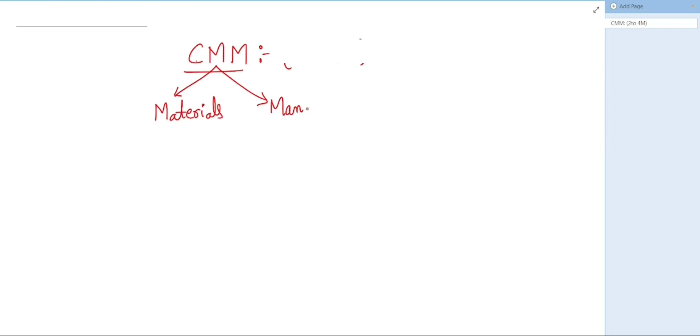In the materials category, we study about cement, then concrete, brick, and finally timber. So these are the materials we are going to study: cement, concrete, brick, and timber. Obviously these are the materials used in construction or for buildings.

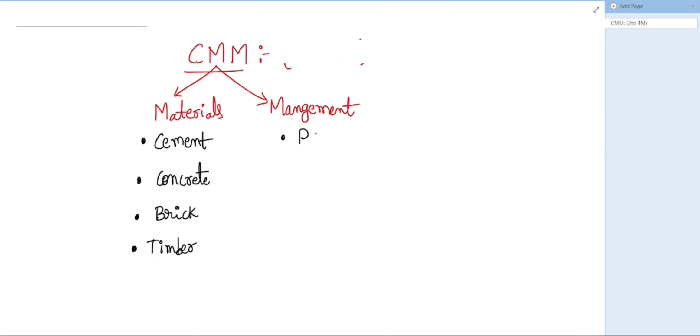And in management, we study about PERT and CPM. PERT is nothing but Program Evaluation Review Technique, whereas CPM is Critical Path Method.

So these are the contents of this subject. Now, the purpose of the subject - if you take total civil engineering, this is one of the easiest subjects. So try to concentrate on this subject.

I'll begin first with the materials. In that, I'll start discussing cement, then we'll go for concrete, then brick and timber. After this, we'll begin the second part of this subject, that is management, where we'll discuss PERT and CPM. Okay, all of you?

So here I'll begin with cement. Cement is called with one fancy name, Portland, ordinary Portland cement. In general or layman language, we call it cement, but it has this fancy name known as ordinary Portland cement. So cement means ordinary Portland cement.

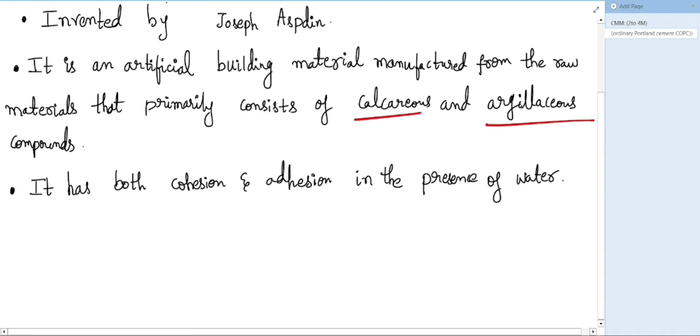So coming to the calcareous category, examples of calcareous compounds are limestone, chalk, etc. These are the major compounds that come under calcareous, used for the manufacturing of cement.

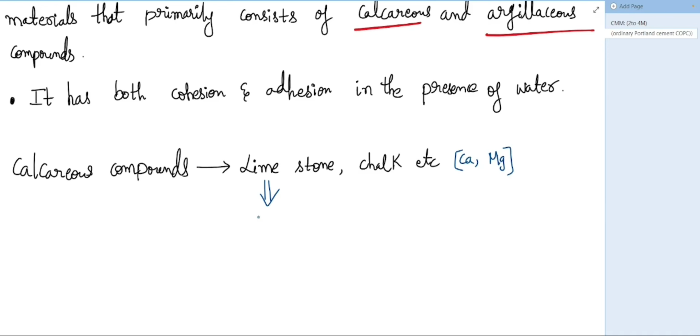Limestone and chalk contain mainly calcium and magnesium. Therefore, the ingredients that can be extracted from these calcareous compounds for manufacturing cement are lime, which is CaO, and magnesia, MgO.

So the next category is argillaceous. Common examples of argillaceous compounds are clay, shale, etc. These are the common examples by which we prepare or manufacture cement.

Now, the pure compounds are elements. The elements present in these argillaceous compounds are silicon (Si), aluminum (Al), and some impurities may also be present, like alkalis, sulfur, and iron. These elements are present in this argillaceous compound, but not in isolated form; instead, they are present in combined form.

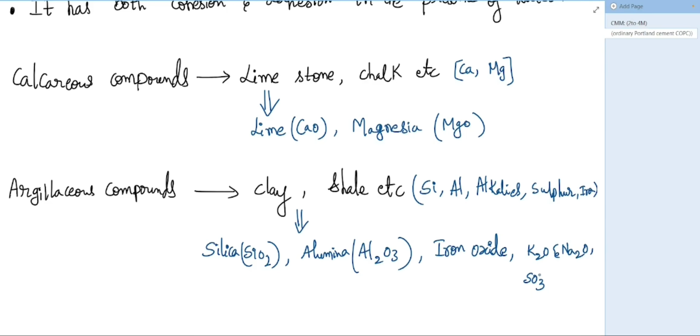For remembering these ingredients, I'll give you a code word. Please try to listen. This code word follows the percentage or proportion of the ingredients present in cement: L-S-A-I-M-A-S. Please remember this code word with respect to the descending order of percentage of ingredients present in the manufacturing of cement. Here, in L-S-A-I-M-A-S, L represents lime.

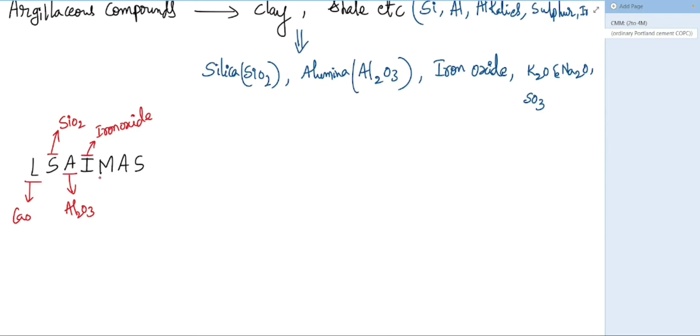Therefore, in cement, lime is present in the greatest amount. S represents silica. So the first major constituent in cement is lime, around 60 to 67%, and next is silica, around 17 to 25%. After that is alumina, which is further less, and then iron oxide, further less still. M is magnesia, and A is alkali, because alkalis are present in very little amount.

Alkalis are present only in traces. These alkalis are present in cement due to impurities resulting from the clay or argillaceous compounds. Those impurities we can't remove, no matter how precisely and sophisticatedly we carry out the manufacturing of cement. Still, some impurities in the form of alkalis are present in clay, so they remain in traces. Actually, they are unnecessary elements, but still they are present in cement.

So in the same way, this sulfur is also present. Now, are you clear about the ingredients present in cement in descending order, starting from lime to sulfur? L-S-A-I-M-A-S, right? L is lime, S is silica, A is alumina, I is iron oxide, M is magnesia (MgO), A is alkalis, and S is sulfur or sulfur trioxide.

Okay, so now let us try to understand the function of each ingredient in cement: the percentage amount present in the cement and its function. It means what exactly this ingredient contributes to the cement and what happens if it is present in excess. Now let us discuss about that.

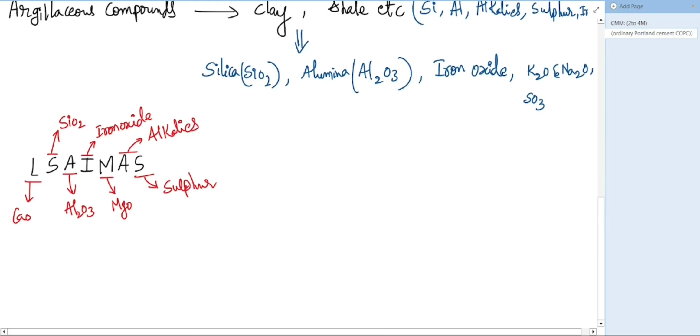So as I said, before going into the discussion of these ingredients, let me explain the reason for adhesion and cohesion. In cement, adhesion is due to calcareous compounds, and cohesion is due to argillaceous compounds, that is clay. Adhesion in cement is due to calcareous compounds such as limestone, chalk, etc. Because these calcareous compounds mainly consist of lime, which imparts adhesion or binding property. That is why adhesion is due to calcareous compounds such as limestone, chalk, etc.

Whereas cohesion is due to, as already discussed in our geotechnical engineering, the inherent property of fine grained soil such as clay. The same applies here also. Cohesion is due to argillaceous compounds or materials, argillaceous materials like clay.

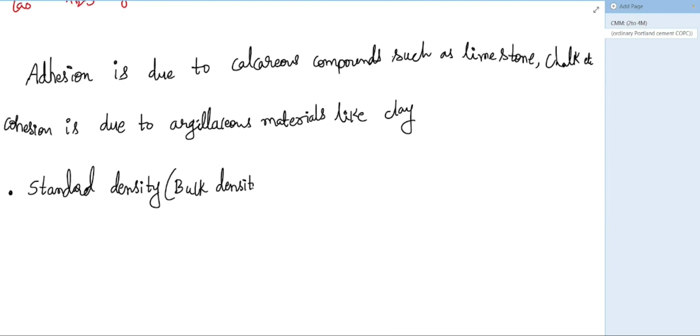So standard density of cement is 1440 kg per meter cube. So standard density of cement or bulk density of cement is how much? 1440 kg per meter cube.

So from this, can we calculate the volume of cement present in one bag? Generally one bag will have a weight of 50 kg, right? So one bag of cement is having how much weight? 50 kg. So density is known to us and obviously the weight is known to us. Therefore, the volume of cement present in one bag is how much? This is 50 divided by 1440, which comes out to be 0.035 meter cube, which is 35 liters. So one bag of cement has how much volume of cement? 35 liters, because one bag of cement weighs 50 kg and standard density is 1440 kg per meter cube.

Clear to all of you with this concept? So please try to respond. Clear to all of you?

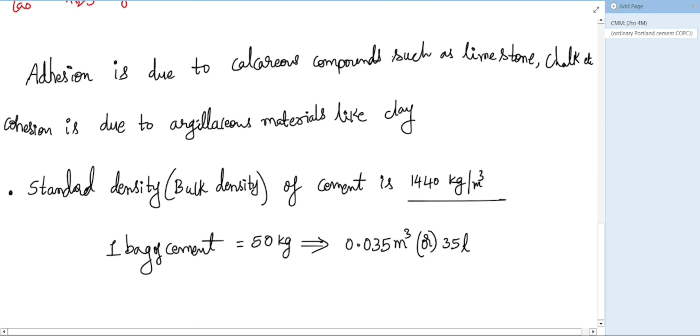Okay, now let us see the functions of the ingredients that are present in cement.

So chemical composition of raw materials. This chemical composition consists of various oxides. What are those oxides? LSAIMAS, right? Please remember this code word LSAIMAS.

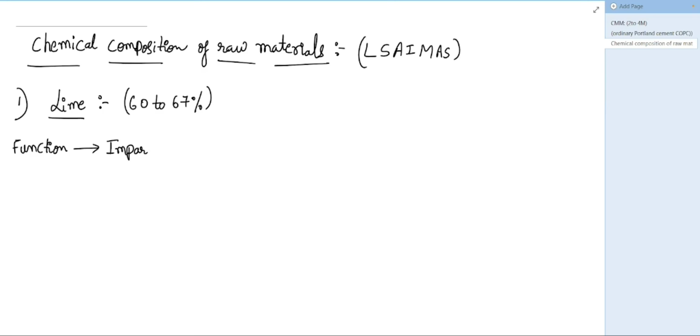And the purpose of this lime present in the cement - let me mention the function, or you can say purpose - is that it imparts binding and strength. So lime imparts binding and strength.

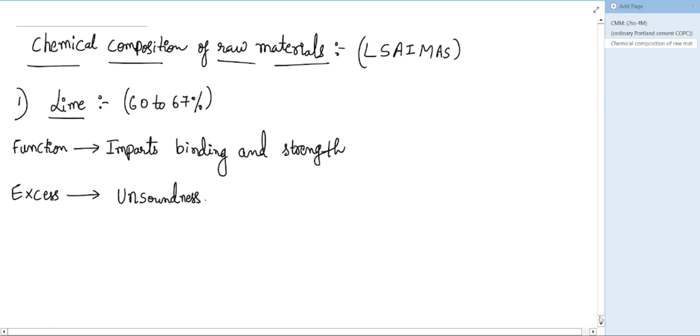But excess of lime causes unsoundness. What is meant by unsoundness and soundness? First you please try to understand, and later we'll discuss how the excess of lime will cause unsoundness.

Delayed increase in volume, or slow increase in volume, is known as unsoundness. Then what is meant by soundness? Soundness means no volume change or no volume increase. So unsoundness is nothing but delayed increase in volume, and soundness is nothing but no volume increase.

Now coming to the lime. As we know, lime's chemical formula is CaO, which is called quicklime. Why is it called quicklime? Because it is having higher affinity towards water.

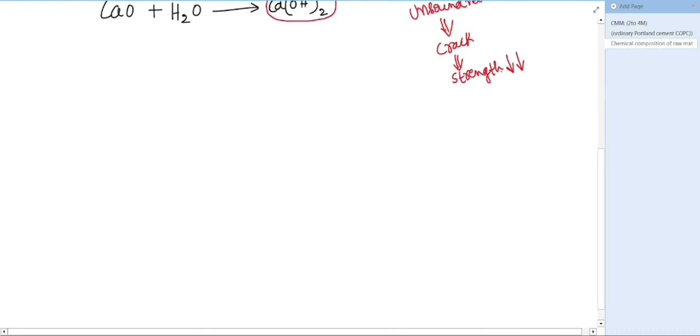So next important oxide is silica, SiO2. It is present in an amount of 17 to 25%. So in the cement, silica is present in 17 to 25%.

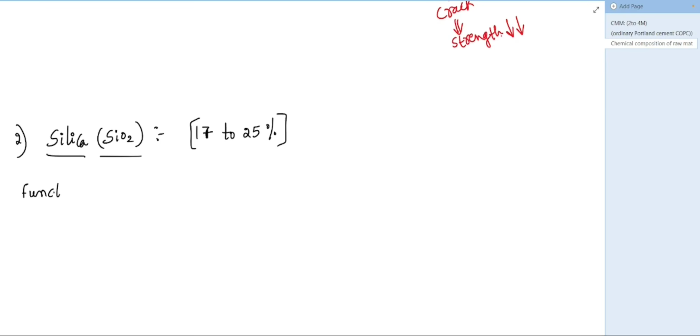The silica present in cement will also induce binding and strength. So the function of silica is same as that of lime. Please understand both lime and silica combinedly induce or produce binding and strength in the cement. Alone, lime or silica will not produce strength and binding. Combinedly, lime and silica produce strength in cement. It means this lime and silica combine and form calcium silicates.

Two types of calcium silicates are going to form during the manufacturing process of the cement. We'll discuss those calcium silicates in Bogue's compounds. As of now, we are discussing the required chemical composition that should be present in raw materials of the cement. But after manufacturing, we'll also discuss about constituents of the cement, that is constituents present in the clinker, where Bogue's compounds are present.

So this calcium silicate is the combined component due to lime and silica that induces strength and binding. Two types of calcium silicates are present in the manufactured cement: tricalcium silicate and dicalcium silicate. We'll discuss about those in detail. Don't worry, but as of now try to understand what I'm explaining. So combined silica and lime induce binding and strength in the cement.

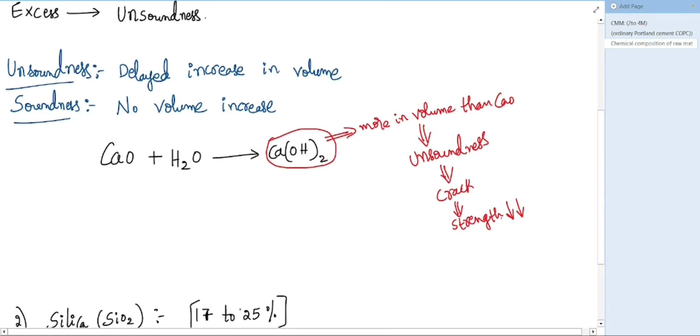But as of now, please try to understand briefly what is meant by setting. Setting is nothing but losing the plasticity present in the cement. For cement to gain strength or to get harder, we need to add water to it—that is known as hydration of the cement. Without hydration, there is no development of strength and binding nature of the cement. After adding water, the cement becomes like a paste having some consistency. Now losing that consistency, plasticity, or fluidity nature is known as setting time. Excess of silica increases the time taken for losing that plastic property.

Why? Because silica is obtained from clay. In geotechnical engineering, we discussed in detail about the plasticity property of fine grained soil, mainly due to the presence of clay minerals like montmorillonite, illite, kaolinite, and also due to the presence of adsorbed water. So if more silica is present, it indicates more clay is present in that cement, and therefore more plasticity is present, so more time is required to lose that plasticity. That is the reason for slow setting if excess of silica is present in cement.

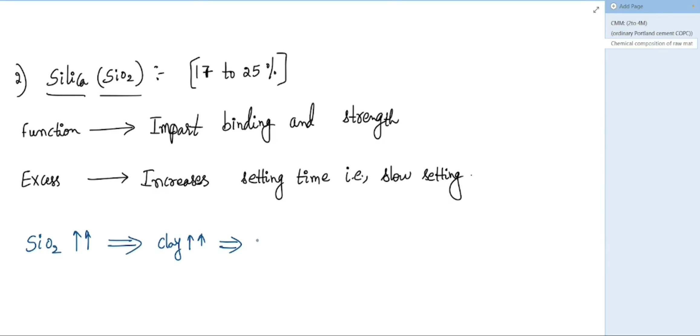So more amount of silica represents more clay. More clay further represents more plasticity. As the plasticity is more, more time is required for it to vanish, and this increases setting time.

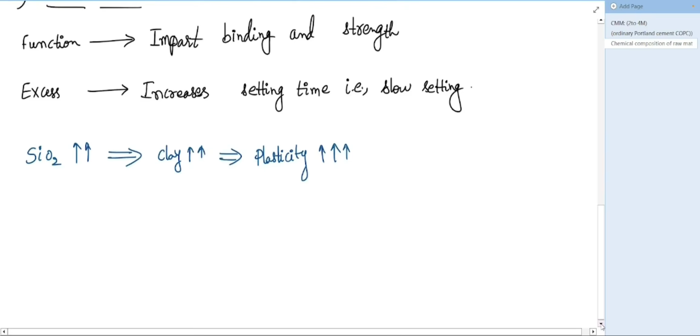So next, the next oxide that is present in cement raw materials is alumina, Al2O3. The third one is alumina.

The percentage of this alumina is around 3 to 8. Now the function is to cause quick setting. Alumina induces quick setting, or imparts quick setting. If more alumina is present, then less time is required to lose that plasticity. It causes quick setting.

But excess of alumina causes plastic shrinkage and reduced strength. Shrinkage means reduction in volume. Therefore, excess causes plastic shrinkage and reduction in strength.

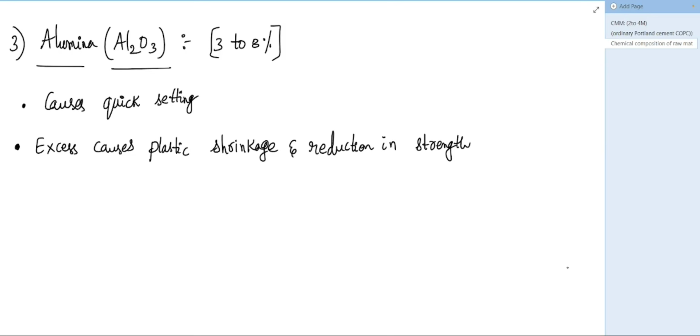So how does the excess of alumina cause plastic shrinkage and reduction in strength? Let us try to understand. The main function of alumina in cement is to cause quick setting. Setting is nothing but the time taken to lose the plastic property or plastic nature of cement when mixed with water. For getting the strength of cement, water is to be added, known as hydration. Hydration of cement is required, or mandatory, for the development of strength. During hydration, or hydration of cement, is basically an exothermic process.

So during hydration, heat is evolved. It means when water is added to the cement, the oxides present in the cement will react with the water. Lime reacts with the water, silica reacts with the water, and alumina will also react with the water. But out of all these constituents, alumina is the one which reacts with the water first. So alumina reacts with the water first and it releases a high heat of hydration.

So here there are two terms: rate of hydration, which I'll explain in detail along with setting time and everything else. Rate of hydration means the reaction rate of the ingredients of the cement. The rate of hydration of alumina is very high.

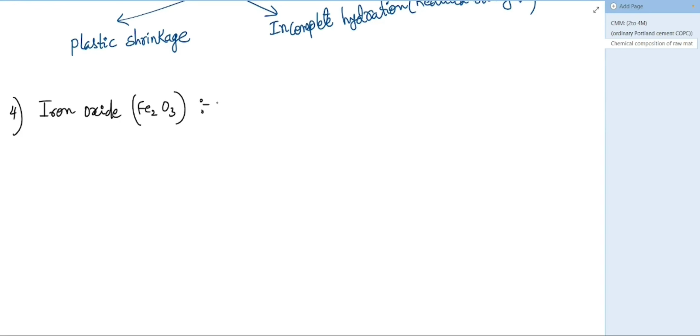Okay, for the next one. Next is iron oxide, that is Fe2O3. This iron oxide is present in an amount of 0.5 to 6%.

So the function of iron oxide is to impart color. Color of the cement is due to iron oxide, and it also induces strength indirectly to the cement. So what is the function of iron oxide? It imparts color, and it induces strength indirectly, but not directly like lime and silica. Lime and silica are the constituents which directly induce strength to the cement, whereas iron oxide induces strength indirectly. Let us discuss how iron oxide induces strength indirectly and how it affects the cement.

Generally iron oxide is reddish in color. So color of iron oxide is reddish, present in a percentage of 0.5 to 6%. Whereas in the very same cement, lime is present in about 70%, actually 60 to 67%. So color of lime is white. Now the color of cement is due to the mixture of this reddish and white color, and finally the combination appears like a greenish grey color.

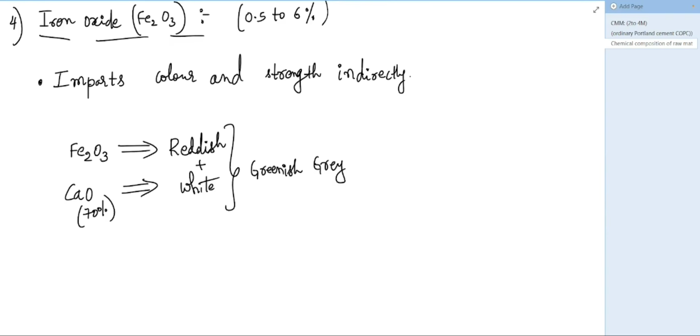And how does this iron oxide introduce strength indirectly? Iron oxide imparts strength indirectly by fusing the correct proportion of lime and silica for the formation of calcium silicates, that is tricalcium silicate and dicalcium silicate. In the absence of iron oxide, fusion of lime and silica does not occur properly, and the strength will not develop due to the non-formation of calcium silicates. So in that way, iron oxide is contributing strength indirectly.

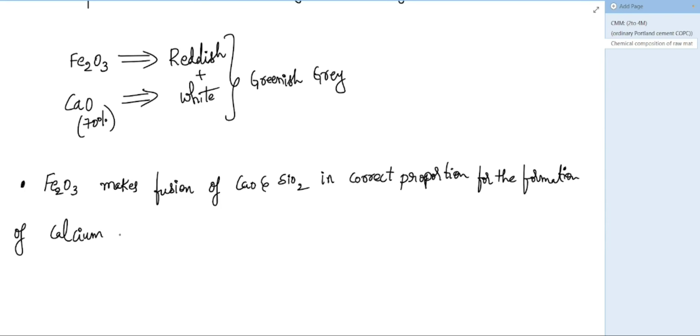So Fe2O3 imparts strength indirectly. Fe2O3 makes fusion of lime and silica occur in correct proportion, for the formation of calcium silicates. Calcium silicates are the compounds which produce strength in the cement. There are two types of calcium silicates, tricalcium silicate and dicalcium silicate. As of now don't worry, we'll discuss those calcium silicate Bogue compounds later in this cement topic.

This is the reason why white cement has no strength. You are aware of white cement, right? White cement, being white in color, has no iron oxide in it, hence it has no strength, even though white cement and OPC, ordinary Portland cement, have the same amount of lime and silica in it.

Still, white cement has no strength because of absence of Fe2O3. If there is no Fe2O3, then calcium and silica will not fuse in correct proportion for the formation of calcium silicates, and there is no development of strength.

For the white color in white cement, we remove iron oxide. Hence, there is no strength in the white cement. Therefore, white cement is not used for regular construction. Basically, it is used for putty work and for aesthetic purposes. This is about the iron oxide.

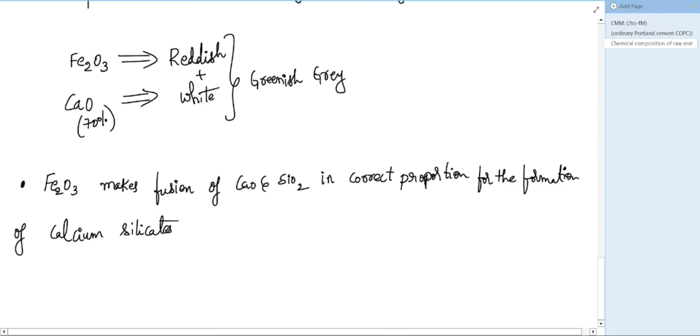So, the next oxide is magnesia, MgO. It is present in 1 to 4%. This magnesia imparts hardness and also yellow tinge color.

Excess of this magnesia causes unsoundness. How does magnesia cause unsoundness? If more or excess magnesia is present in cement, it will react with sulfate formed from the sulfur present in cement, and they give rise to magnesium sulfate. This magnesium sulfate is obviously more in volume than original magnesia, hence it causes unsoundness.

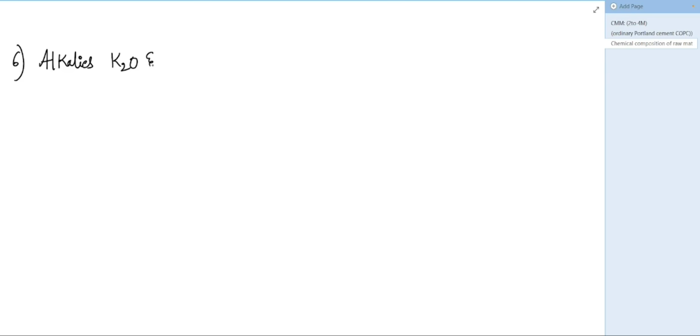So that is the function and excess effect of magnesia. After this, alkalis. They are mainly K2O and Na2O. These alkalis are present in the cement due to the impurities of the clay, present as trace elements, so they are unavoidable.

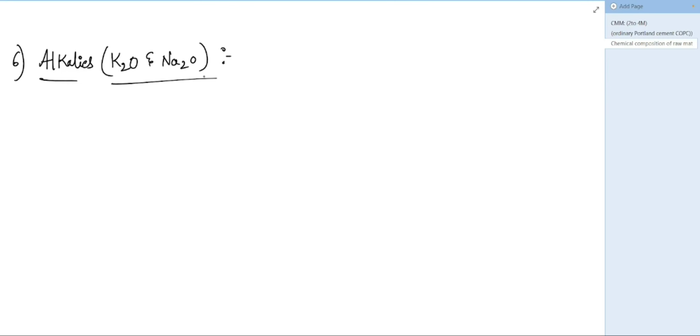Therefore, there is no particular function of alkalis, but these alkalis cause efflorescence. If excess, alkalis have no function, but if present in excess, it causes efflorescence, and subsequent cracking due to that efflorescence.

Now, what is meant by efflorescence? Let us try to understand. These alkalis present in the cement are of no harm if they are in dissolved form in water. But once the water gets evaporated, or finishes after hydration, these alkalis will appear onto the surface as a solid or precipitate, and remain on the surface.

Because of these remainings of alkalis on the surface of the cement, it appears like white patches known as efflorescence. If a greater amount of white patch is present, it will lead to cracking. The percentage of alkalis is around 0.4 to 1.3.

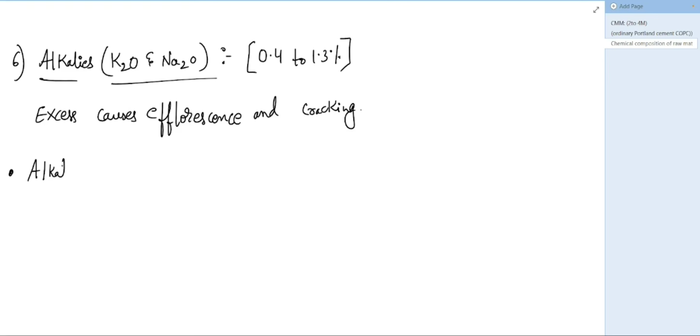Let me write that point. Alkalis present in cement are of no harm if they are in dissolved form in water. But once water gets evaporated, the alkalis are left behind in cement and appear on the surface as white patches known as efflorescence.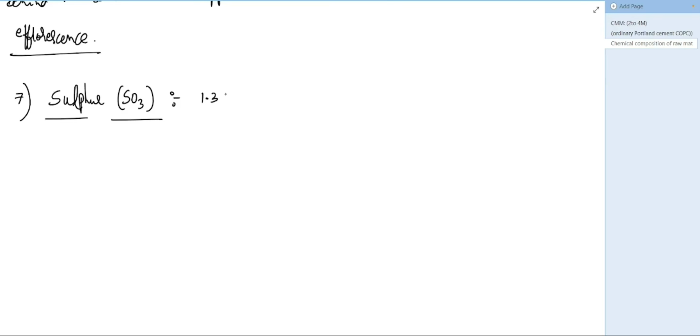Generally it makes cement sound, meaning no volume change, but if excess is present, it makes the cement unsound, like lime. If lime is present, it imparts strength, but if excess lime is present, it reduces the strength, as explained. Similar function here for sulfur as well: it makes cement sound, but excess causes unsoundness.

Excess causes unsoundness, and this unsoundness caused by sulfur is sometimes ignored because the amount of sulfur present in cement is very less. Therefore, unsoundness caused by sulfur alone can be ignored.

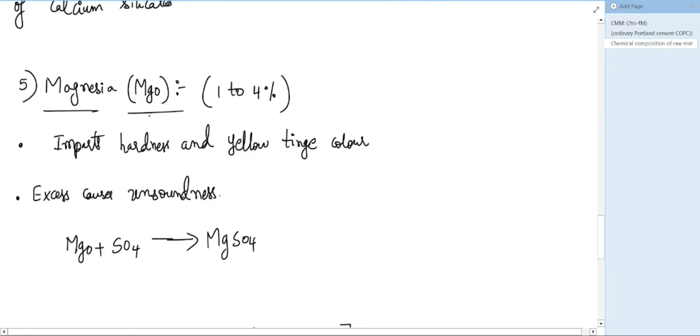Now what are the constituents that cause unsoundness? This can be expected as an objective question. The first and foremost is lime, because it is present around 65% approximately. Next to lime, unsoundness is also caused by magnesia, which is present in very less amount. And after magnesia, it is due to sulfur trioxide, which is even further less. Hence, we ignore unsoundness caused by sulfur.

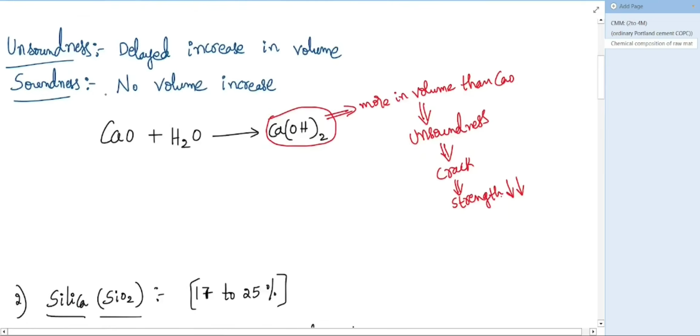Clear with all these various oxides present in the raw materials of cement, all of you? So what are the various oxides? Once again I'll repeat: calcium oxide, silicon dioxide, aluminum trioxide, ferric oxide, magnesium oxide, alkalis that is sodium and potassium oxide, and sulfur trioxide - LCAMS.

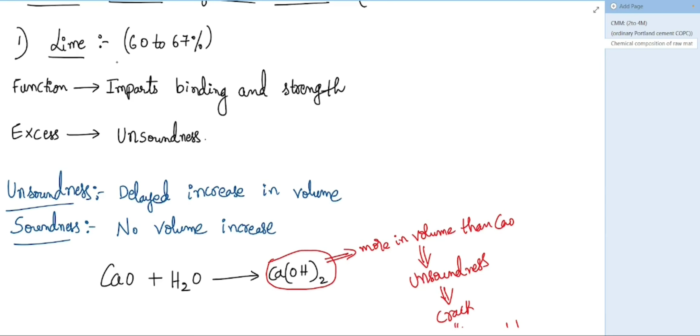And these are the functions. Lime is present in greater amount in cement, around 60 to 67%, which imparts binding and strength, and excess causes unsoundness, which I explained in detail. Coming to silica, it is present in 17 to 25%, which also imparts binding and strength. Therefore both silica and lime combinedly impart binding and strength to the cement.

And for that strength to be produced in the cement, they require iron oxide. Please make a note of that point as well. Now the excess of silica will increase the setting time, the reason I explained.

Now coming to alumina, it is present in 3 to 8% and causes quick setting. Quick setting can also be called flash set. This alumina immediately reacts with water upon adding water to cement, and releases high heat of hydration, so that quick setting occurs. Excess of alumina causes plastic shrinkage and reduction in strength, as explained here.

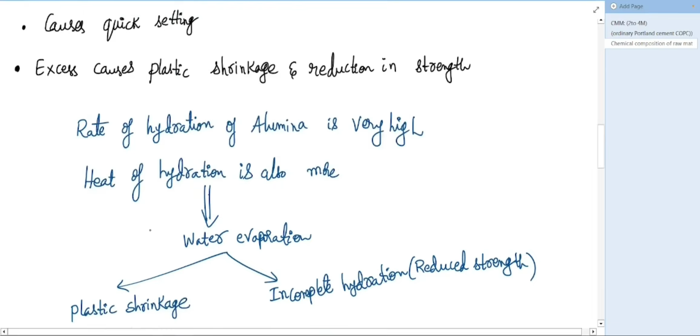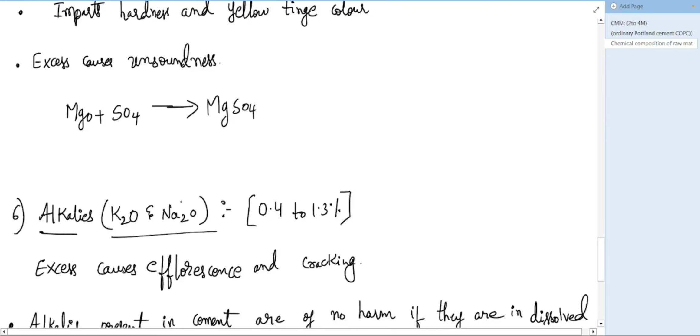Iron oxide introduces color and strength indirectly. After that, magnesia causes hardness and a yellow tinge color, and causes unsoundness. Alkalis cause efflorescence. Sulfur is sound but excess causes unsoundness.

Clear all of you? Please respond so that I'll proceed to the next topic, that is manufacturing of cement. So let us see how cement is manufactured and what are the methods and steps involved in it.

Manufacturing of cement. So cement is a product obtained by pulverizing.

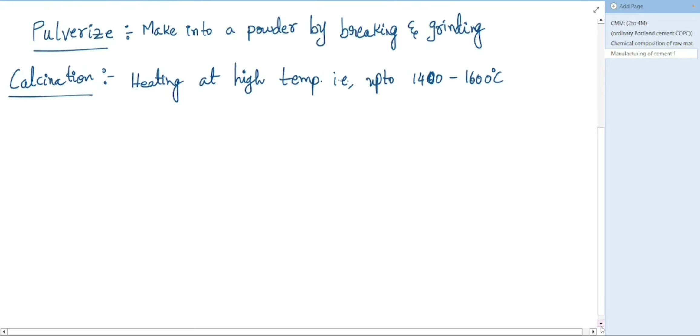So clinker is a hard substance formed after calcinating the raw materials in a rotary kiln.

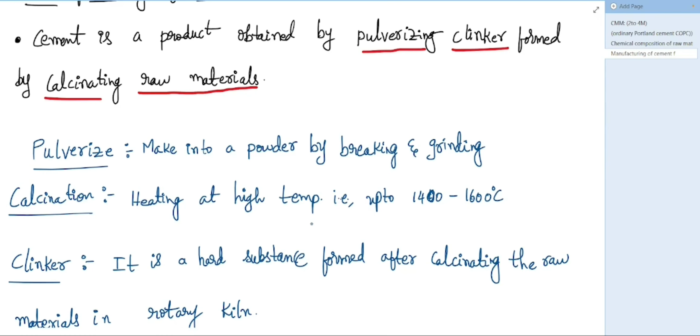Okay, so these are the words we have discussed in the manufacturing of cement. So pulverizing, what is meant by pulverizing? Pulverizing is nothing but making into a powder by breaking and grinding. Then what is calcination? Heating at high temperature, that is up to 1400 to 1600 degrees centigrade. Because of this heating of ingredients, there forms a hard rock-like substance known as clinker.

In the rotary kiln, that hard rock-like substance has to be made into a powder form known as pulverization. So this is how the cement is manufactured. Clear all of you?

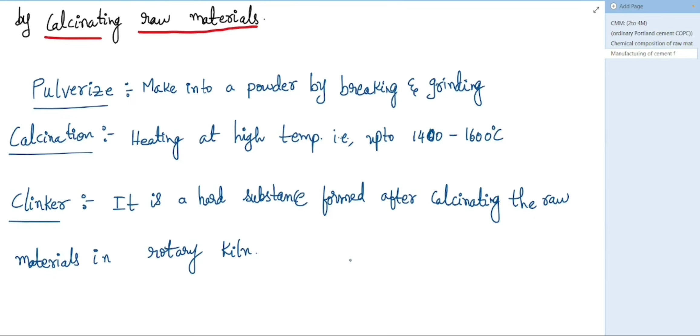Now the steps involved in manufacturing. Let us see the steps involved in manufacturing. So there are 3 steps.

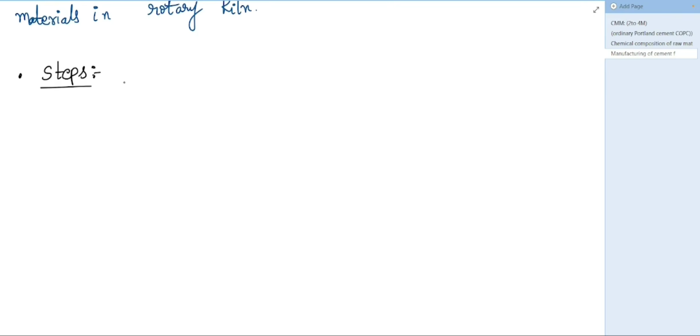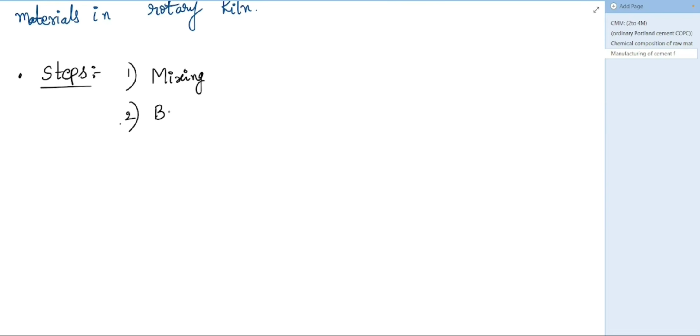One is mixing. It means the raw materials have to be proportioned and mixed to a required level properly, and then we need to burn it. So burning, that is calcination, burning or heating of mixed raw materials, and finally grinding.

After grinding we get the required product, cement. During this grinding we add one more ingredient known as gypsum. So gypsum is being added.

So during this step of grinding, 2 to 3% of gypsum is added. What is the chemical formula of gypsum? CaSO4.2H2O, right? This is the chemical formula of gypsum. So gypsum of 2 to 3% is added during the grinding.

Therefore, after the formation of clinker and during its pulverizing stage we add gypsum. Why do we add gypsum? Because in cement there is present alumina which induces flash setting. If flash setting happens in cement, then the proper strength cannot be produced and the desired properties also cannot be produced. Therefore, to retard the initial setting time or flash setting, we add 2 to 3% of gypsum.

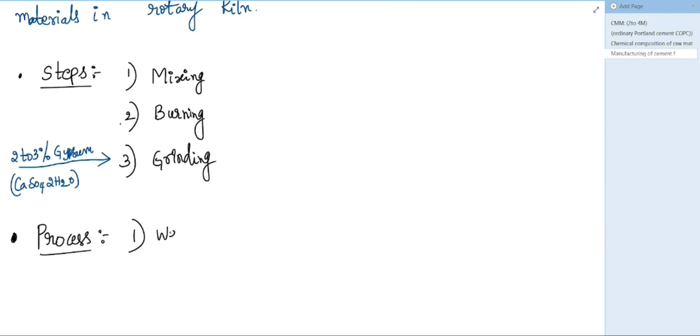So manufacturing of cement can be done by two processes, that is wet process and dry process. So two processes are there. One is wet process and the other is dry process.

As the name suggests, in wet process, we mix the raw materials that are required for manufacturing cement in wet condition by making use of water. Whereas in dry process, we don't use water for mixing. Instead, we use compressed air.

So the wet process is an old process. For many years, the wet process remained popular because of the possibility of more accurate control in the mixing of raw materials, and also at that time, the techniques of intimate mixing of raw materials in powder form were not available. Hence, the wet process was in use for a very long time. But later, the dry process gained momentum with the modern development of the technique of dry mixing of powdered material using compressed air.

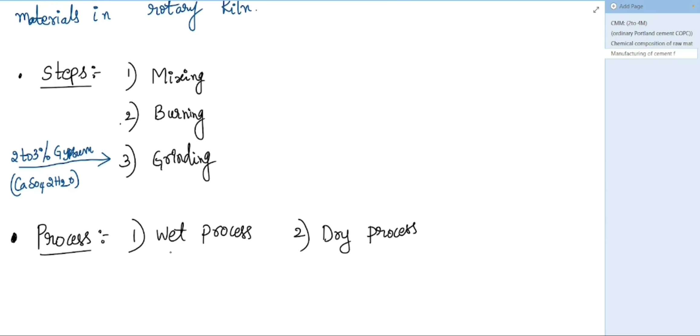So let me write that point. From the name itself, you can try to understand it.

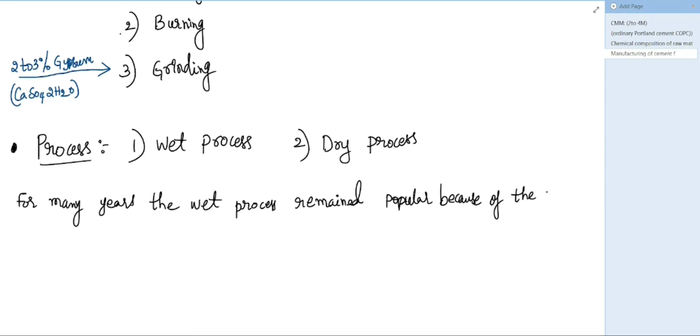For many years, the wet process remained popular because of the possibility of more accurate control in the mixing of raw materials.

Later, the dry process gained momentum with the modern development of the technique of dry mixing of powdered raw materials using compressed air. Clear all of you?

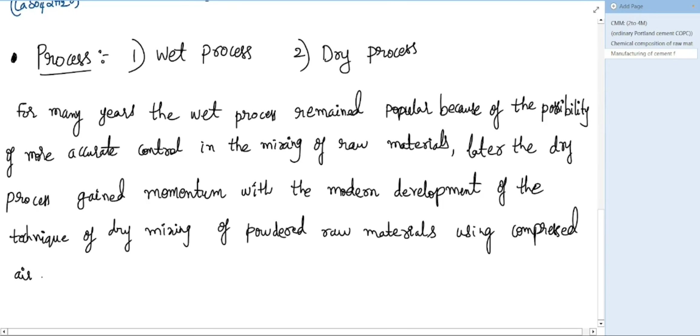So this is in brief about wet process and dry process. Now let us try to understand wet process and dry process with a schematic flow chart. So first one, wet process.

Be it a wet or dry process, raw materials remain the same, but the mixing of the raw materials decides the type of process. So here it is argillaceous, that is clay, and limestone, that is calcareous.

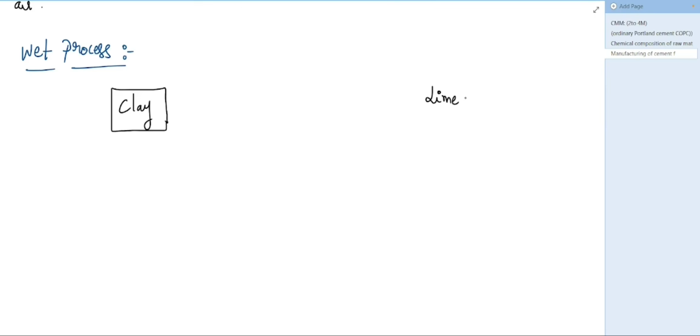So this limestone is first crushed by using crushers. Limestone is crushed using crushers and taken into the storage basin.

Now the clay, whatever is taken for manufacturing cement, is admitted into wash mills, because clay consists of some pebbles, cobbles, etc. Some foreign elements it contains, so for that we take that clay into the wash mill.

After washing the clay, we take it into the storage basin for clay.

Now these two constituents from the storage basin are taken into grinding mills. There, by making use of water, we prepare a slurry. So these two ingredients from the storage basin are taken into wet grinding mills to make slurry.

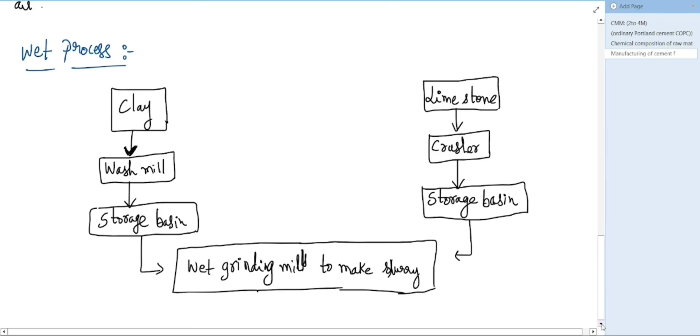Now this slurry is blended to the correct proportion, because raw materials that are expected to be present should be in the desired percentage or proportion. Then only the required properties of the cement can be achieved. Lime may be present in 60 to 67%, and that range mainly depends upon the function for which the cement is being used. Accordingly, in this step, blending of slurry to the correct composition is done.

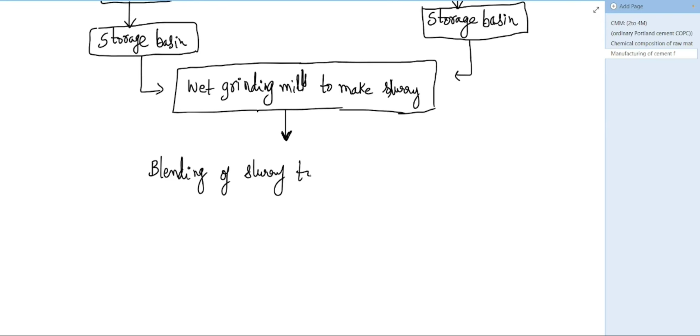So here, blending of slurry to correct composition is the step. After blending the slurry to the correct composition, we take this slurry to the storage basin — storage of corrected slurry.

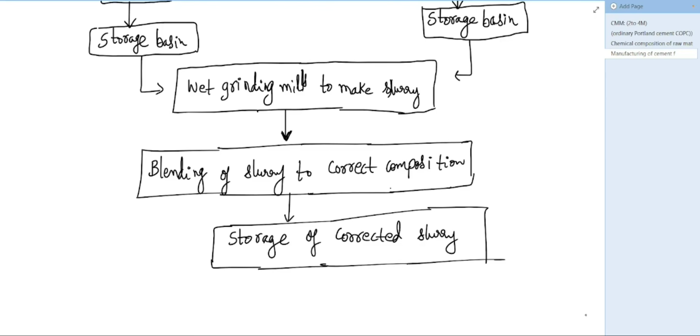Now this corrected slurry is taken to the rotary kiln, where burning at high temperature takes place, around 1400 to 1600 degrees. For the wet process, the temperature maintained is around 1500 to 1600 degrees centigrade.

Now for the burning, here we use fuel. That fuel is either powdered coal, oil, or natural gas.

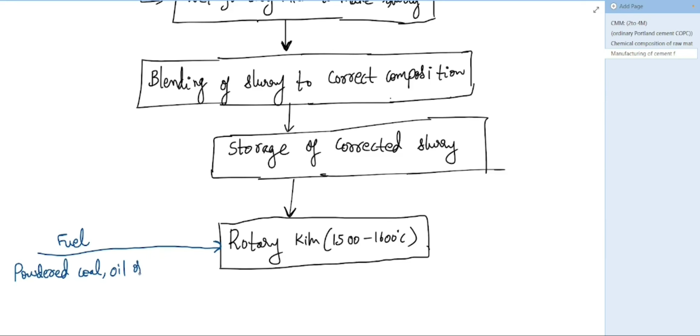After burning, this corrected slurry becomes clinker. So clinker is formed.

Now this clinker is further made into powder form by grinding and breaking. Therefore, this clinker is taken into ball mills where it is ground, for pulverizing.

During this pulverizing process, we add gypsum to the cement — addition of 2 to 3% of gypsum.

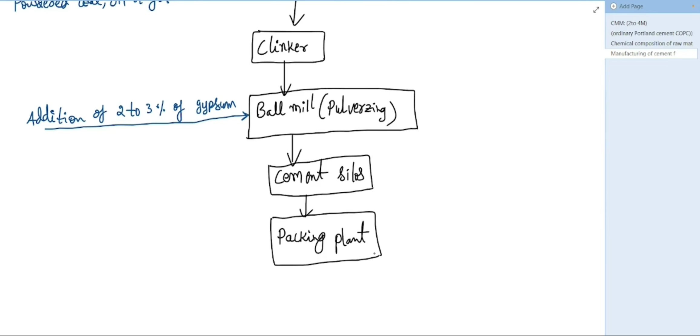So this is the schematic flowchart for the wet process. I'll show it again from the beginning, please try to observe. So this is the wet process: be it wet or dry, first we take those two raw materials separately.

As it is a wet process, we mix and grind them by making use of water so that slurry is formed. After formation of the slurry, we blend it for the correct composition as per the requirement and usage of the cement in the field.

After blending the corrected composition of the slurry, we heat it in the rotary kiln using fuel in the form of powdered coal, oil, or gas. Then clinker is formed. The formed clinker is ground, that is pulverized. During that process, we add 2 to 3% gypsum, so that the initial setting time is increased, that is, retardation of quick set occurs.

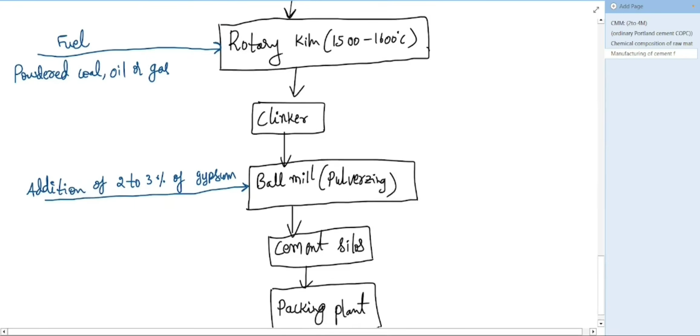Finally, cement is formed. Now, what is clinker? Clinker is a hard substance formed after calcination of the raw materials, as we have discussed. This clinker's chemical composition consists of Bogue compounds — that is the point to be noted. So this clinker consists of what?

Bogue compound. The chemical composition of clinker is known as Bogue compounds. After heating in the rotary kiln, we get a clinker, which consists of compounds known as Bogue compounds. We'll discuss these after completing the manufacturing process.

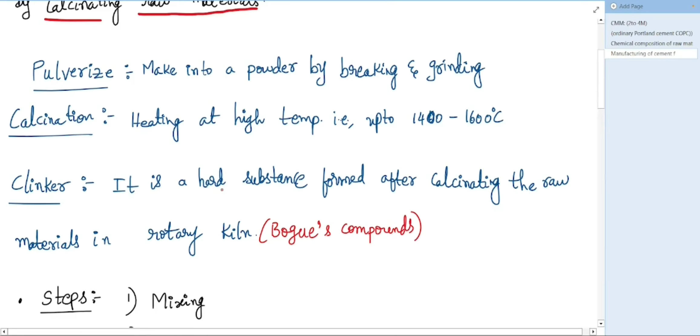So this is the wet process. Are all of you clear with this wet process? Okay, I'll proceed further. Now let us see the dry process.

Next is the dry process. Be it wet or dry process, raw materials remain the same: clay and limestone. In the dry process, water is not added. Therefore, these raw materials are first crushed into powder form. So in the dry process, both raw materials are crushed separately.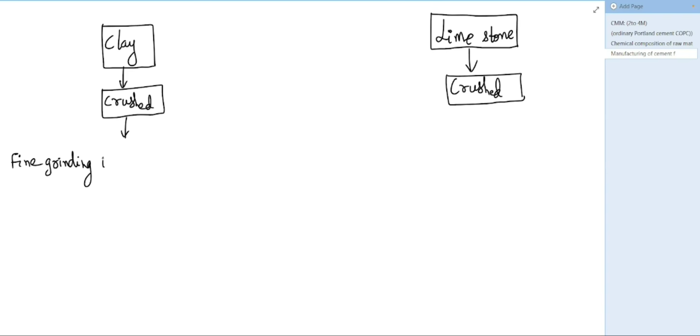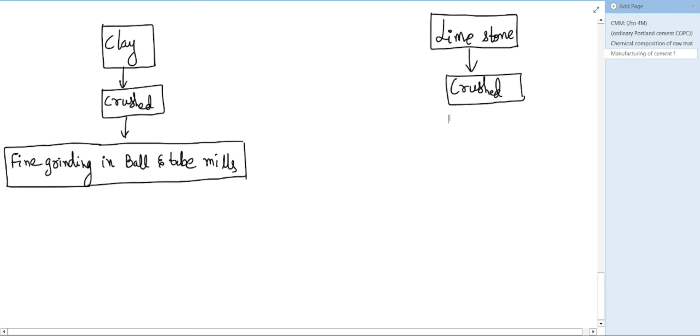Now these crushed raw materials are further fine grinded in ball and tube mills. After fine grinding, they are taken into the storage basin. Since mixing should be done in dry form, the raw materials have to be ground fine in two steps: first the preliminary crushing, and later fine grinding in ball and tube mills.

Both raw materials, kept in different storage basins, are now taken into a combined mixing basin in the correct proportion. So here both raw materials from the storage basins are taken into a combined mixing basin, where the correct proportion is set through mixing.

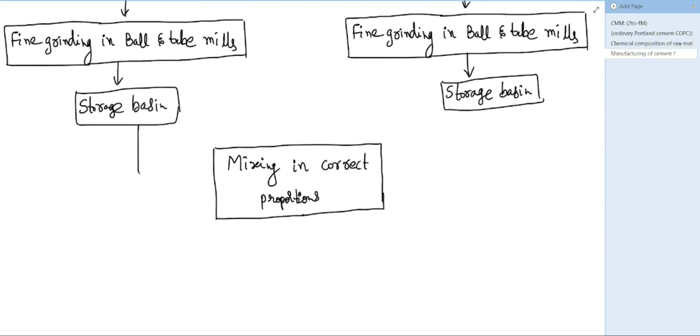After mixing in the correct proportion, the raw materials, or raw ingredients, are preheated by exhaust gases. This preheating has to be done before taking them into the rotary kiln. Preheating is required, otherwise the correct proportion won't be sustained. Preheating is done at 800 degrees centigrade by exhaust gases.

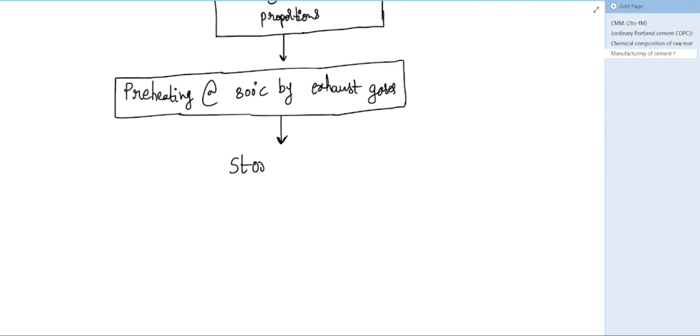Then this correctly mixed portion of dry raw ingredients is taken into the storage tank, where again mixing is done. This is the storage tank for raw mix. After this, we'll take this mix to the rotary kiln.

In the rotary kiln, the temperature is maintained around 1400 to 1500 degrees centigrade. Now, in this case the temperature is less by 100 to 200 degrees centigrade because of the dry mix. Hence, kilns required in the dry process are shorter in height, and the cost of fuel is also less because less temperature is required, around 100 to 200 degrees centigrade less. As fuel, we add either coal, oil, or natural gas.

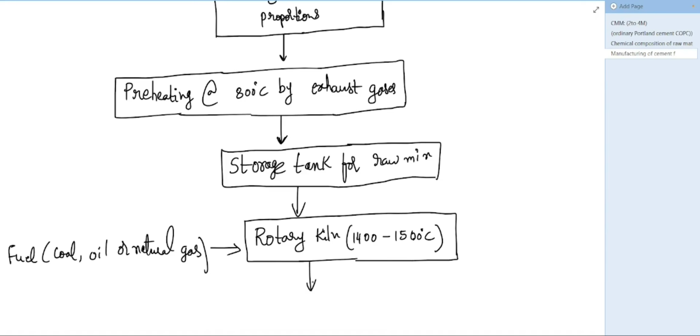So from the rotary kiln, clinker is obtained. Now this obtained clinker has to be pulverized. During this process of pulverizing, we add gypsum. Then cement is formed. After formation of the cement, we take it to the packing plant, from where it is dispatched.

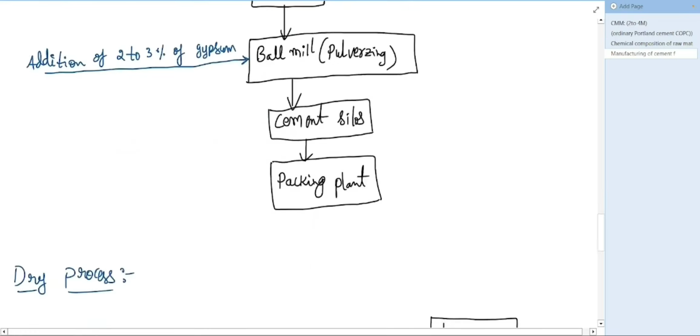Okay, all of you, this is the dry process. So we've discussed the manufacturing. Now let us try to understand the advantages and disadvantages of the dry and wet processes. This is the comparison of wet and dry process.

Dry process is economical due to the following reasons. First, less consumption of fuel in the rotary kiln, as raw materials are in a dry state, leading to less fuel consumption in the kiln.

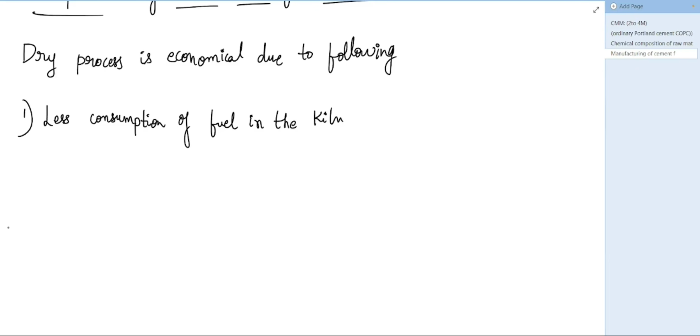Also, shorter kilns are required to heat, whereas in the wet process kilns, if they were of greater height, it would mean longer kilns are required, which are costly and even less responsive to variable clinker demand.

In the wet process, longer kilns are required, which are costly and less responsive to variable clinker demand. So all these points are self-explanatory, based on what we have discussed so far. Next, you will see the advantages of the wet process.

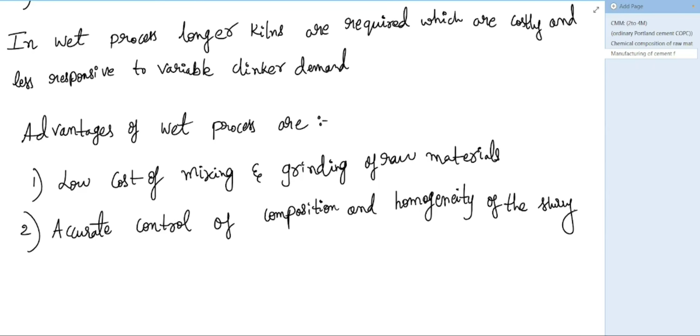Clear all of you? This is all about the manufacturing of the cement. So please respond, are you clear so far?

Next is chemical composition of clinker. Before that, I'll explain the definitions of some terms here, and then we'll go for discussing chemical composition of the clinker.

Plasticity: as we have already discussed this in detail in our soil mechanics topic, but here also it is required, so I'll repeat it. It is the property that gives molding nature to the cement.

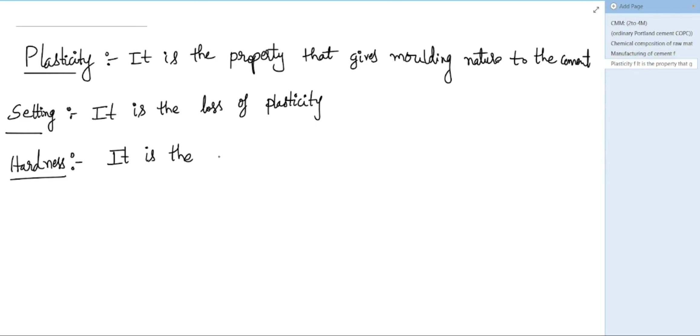Next, hardness. Generally students confuse hardness and setting, so don't confuse. Setting is about loss of plasticity, then what is hardness? It is about gaining the strength. Or more basically, it is defined as the resistance to scratching or abrasion. So hardness for the cement is considered as gaining strength, which can be achieved after having resistance to scratching or abrasion.

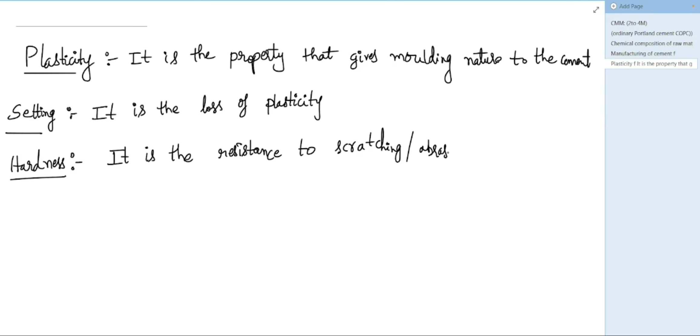Okay, so these are the properties. Now let us see the chemical composition of the clinker.

As we have just seen, clinker is formed by the calcination of raw materials in a rotary kiln. Hence, oxides present in the raw material...

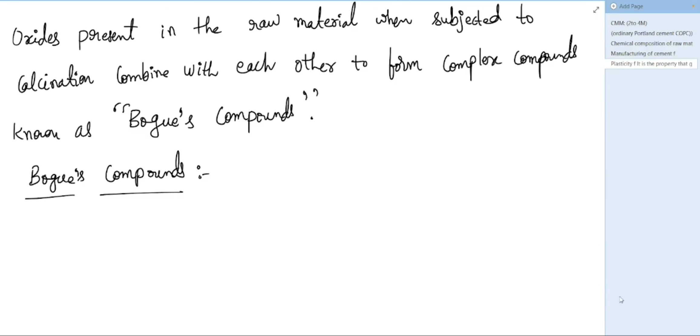The first one is tricalcium silicate, that is 3CaO.SiO2, abbreviated as C3S. This is called alite in literature.

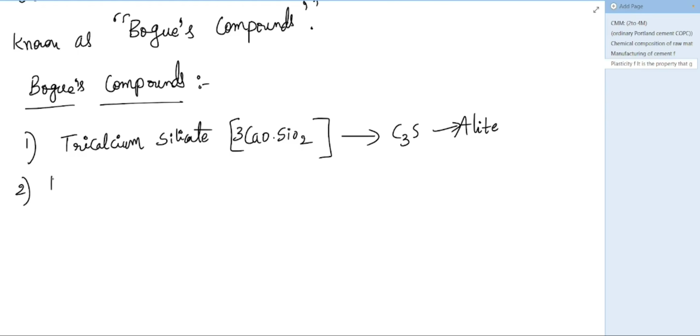Next is dicalcium silicate, that is 2CaO.SiO2, abbreviated as C2S, and in literature it is called belite.

Next, tricalcium aluminate, that is 3CaO.Al2O3, abbreviated as C3A, and this is called as celite.

Next, tetracalcium aluminoferrite, that is 4CaO.Al2O3.Fe2O3, abbreviated as C4AF, and this is called as felite. So these are the four Bogue compounds.

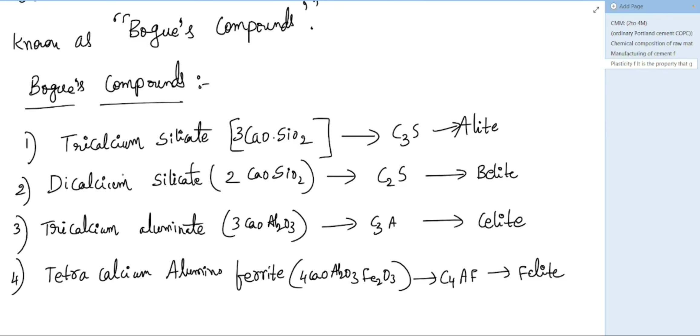And coming to these Bogue compounds' function, percentage, and influence on the various properties of the cement when used in practical scenarios, we'll discuss in our next class. Okay, so please revise.